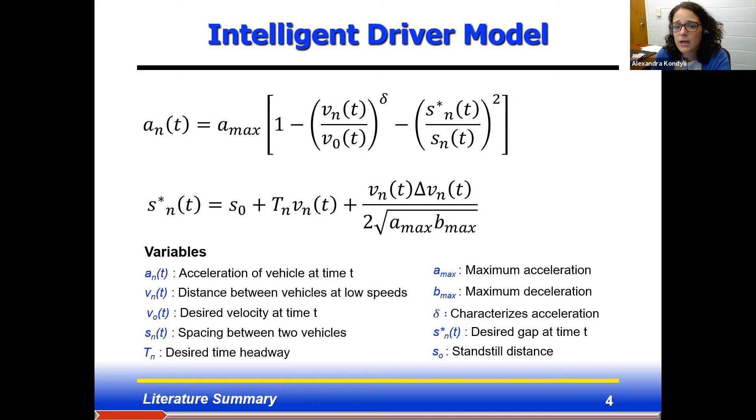As I mentioned earlier, this study focuses on the IDM, and the equation of the IDM is shown here. The IDM predicts basically the vehicle acceleration as a function of the desired speed and the desired space headway. And it is applied to both car following and free-flowing situations.

For situational awareness, which is our second human factors measure, we use the definition of Endsley. Situational awareness is defined as the ability to perceive, comprehend, and project future status of elements. So situational awareness has three components: perception, comprehension, and projection of status.

Research has shown that there's a relationship between workload and situational awareness. If we have very high situational awareness with low workload, that means that the driver can very easily comprehend the information without requiring increased mental processing. And this is basically like an ideal situation. When we have low situational awareness, though, and high workload, tasks require more processing capabilities from the driver, and this means that some elements may be overlooked during the driving tasks, and maybe just one subset of those elements can actually be processed. Of course, this situation is not ideal, as we might have dangerous situations like crashes occurring.

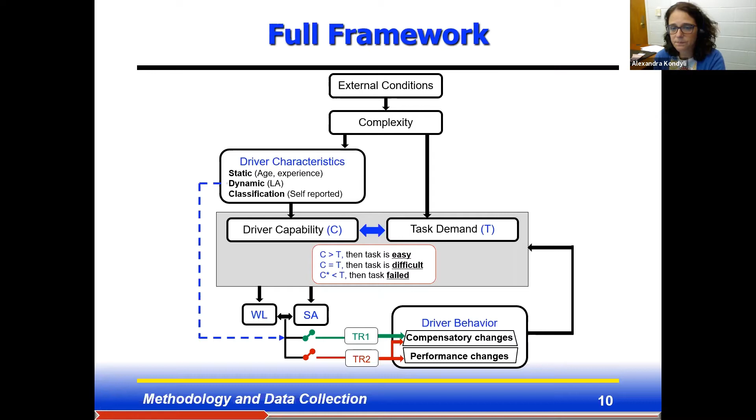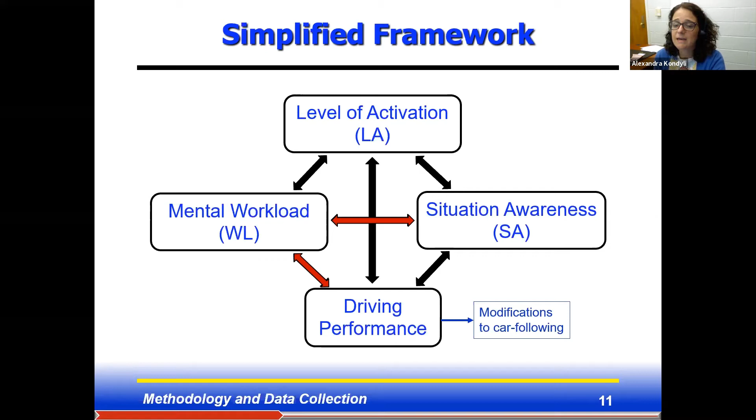To simplify this framework a little bit, in this project, we study the interactions between all of these four measures: workload, situational awareness, level of activation, and driving performance. Of course, some of these have already been studied, for example, workload and situational awareness, as well as workload and driving performance. But a holistic look between these four will give us a better understanding of how car following is affected by this very complex relationship.

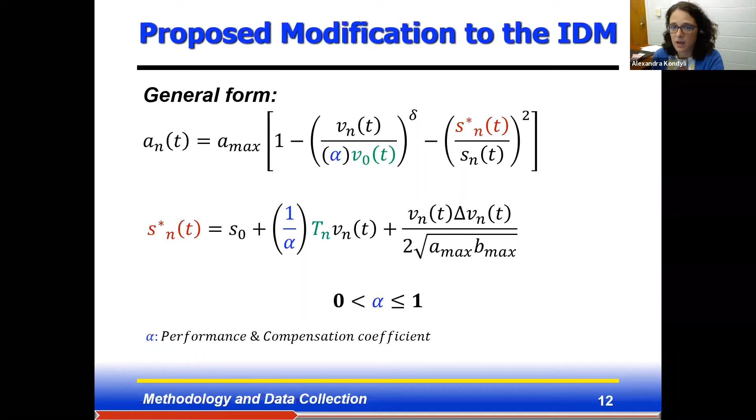Furthermore, we propose to capture the effects of this four-way relationship to the IDM by introducing a coefficient alpha, which captures both the performance and the compensation effects. And this performance and compensation coefficient is being applied to both the equations as it's shown here. This coefficient is calibrated based on actual driver data, which were collected in a driving simulator experiment.

So the equipment that we used in our research is the KU driving simulator, which is an NADS MiniSim simulator enclosed in a half cab. It gives 170 degrees field of view. The simulator is also equipped with an eye tracker, Fovio FX3, which is able to capture pupil dilation and eye gaze duration. And we also had a heart rate monitor and the EEG, all of which were synchronized with the driving simulator.

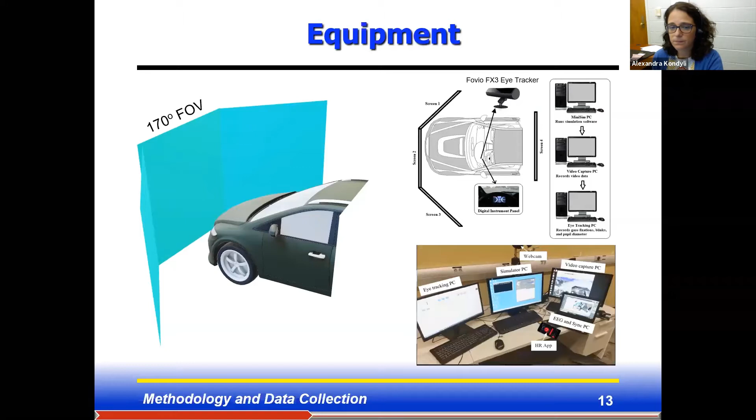Now, all of the drivers had to drive 6 different tasks. And these 6 tasks had varying difficulty. So task 1 was basically the simplest task, and this was used as our baseline. Task 2 was very similar to task 1, but with slightly more traffic. Task 3 had more trucks, and also an inactive work zone was present. And task 4 had increased percent of trucks and more work zone activity. Tasks 5 and 6 had a higher density than the other tasks. And specifically in task 6, we introduced a secondary task.

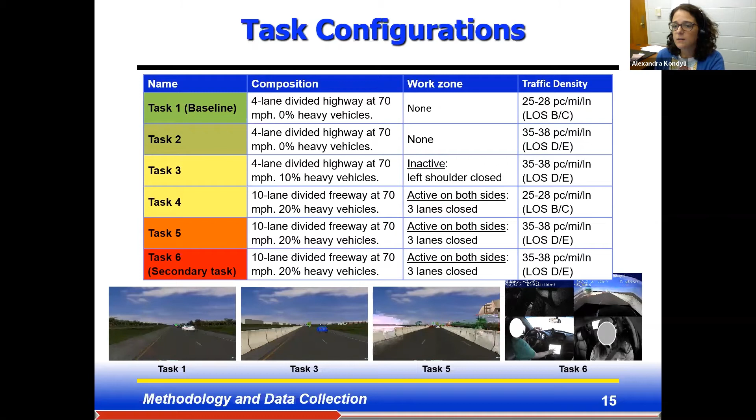So during that secondary task, participants had to use an app like this one that is shown here. And basically in the app, they had to click the correct number that appeared in the screen. So with this, we tried to simulate the driver trying to use their GPS system or any navigation system within the car, and basically taking their eyes off the road to do that.

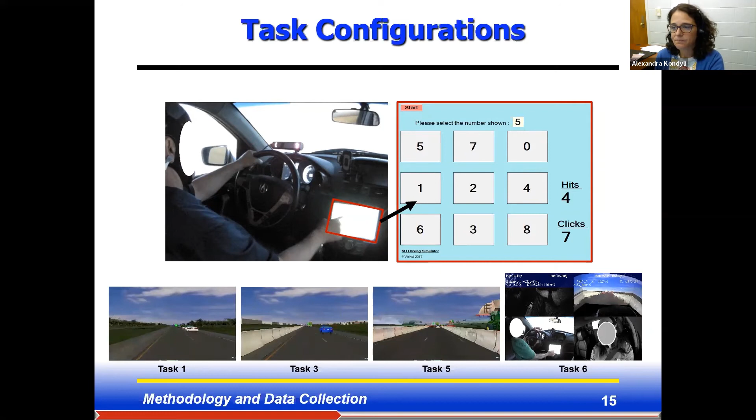We used a variety of data collection techniques. We got a rich data set, and in this way we were able to measure all variables of interest. We used changes in the heart rate. We also used the pupillary response and the index of cognitive activity that was measured from the eye tracker. And we also used the NASA TLX surveys that were administered during the experiment. All of these were used to measure the workload.

For situational awareness, we developed a new technique that measures changes in time to comprehension via gaze overlay, and we also used the SART method. For level of activation, we used the EEG, the power spectral density. And for driving performance, we used all of the variables that are basically collected in the simulator, such as speeds, accelerations, headways, standard deviation of lane position, and so on.

We also collected a variety of data to group drivers based on their traits. So we consider speed, gap, and jerk values. We also used a very elaborate survey instrument to gather the behavioral traits, using surveys found in the psychology literature, such as the PANAS, need for cognition, CRP, neuroticism, empathy, psychological entitlement, and ethical dilemmas. Since we have so many different data and data collection methods, the whole duration of the experiment was approximately an hour and a half long.

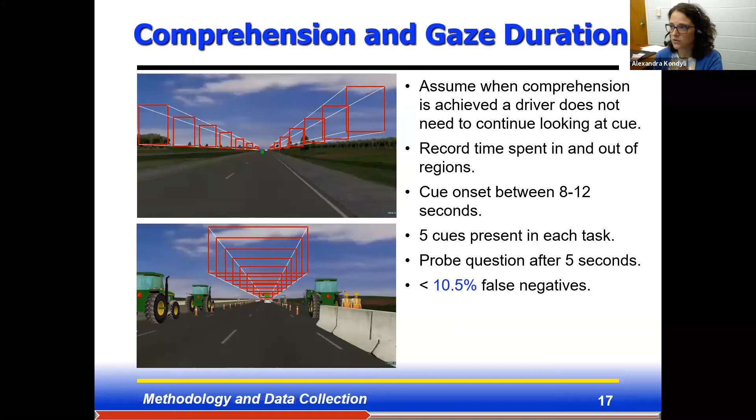Okay. Hi, good afternoon, everyone. Sorry, a bit of a technology problem there. Yeah, so I have control over the slides now. So just to quickly go over what we did, I'm going to reiterate a few things. I don't think I can still move the slides. Dr. Kondyli.

Okay, so I'm going to start again right from here, just to make sure I go over a couple of things.

The study itself was to model car following behavior, and we wanted to take into account how different drivers behave. If any of you have worked with car following, you know we have a lot of calibration parameters that come into play, and we adjust them relatively not knowing what they do. The whole goal is, can we account for some of these calibration parameters and make the calibration of these models way more efficient than it already is? If I'm able to group a couple of drivers together and use one set of calibration parameters instead of calibrating each driver individually, this would significantly reduce the whole effort put into the process of calibration. So that was one of the goals.

We did administer a lot of surveys, as Dr. Kondyli said. One thing I want to point out in particular is the cognitive reflection tasks - a few mathematical questions, and some of you may have come across these. For example, if a lily pad takes 48 days to cover a whole pond, how long does it take to cover half the pond if it doubles in size every day? We administer such questions because they're rather intuitive and they judge the aptitude of a person. So we want to see if their decision-making skills actually affect their car following behavior through such questionnaires.

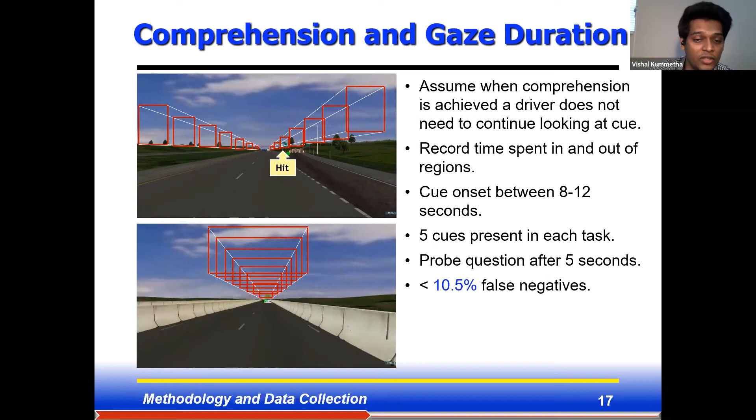Another example is this sign, where we have a variable message sign, and we're trying to see the driver read through the information and see how long it takes him to comprehend what the sign says. Then we administer a probe question right after the cue is passed, and we correctly calibrate the fact that he has comprehended the sign. We present five of these in each of the tasks, and we try to compute the level of comprehension for each driver.

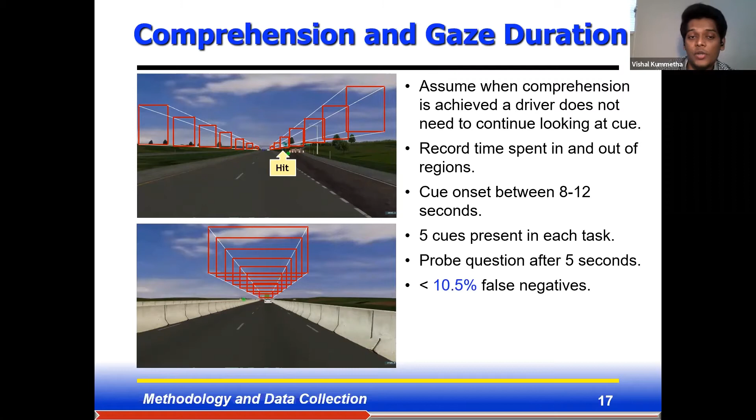Now, overall, the technique used here also resulted in about 10.5% false negatives. By this I mean, for example, people with corrective lenses - it wasn't very accurate in predicting their measurements. So we tend to exclude those from the charts that we created. But more on that in a few slides.

Now, we also plotted some driving performance, aggregate driving performance measures - for example, how does the average speed vary across these tasks?

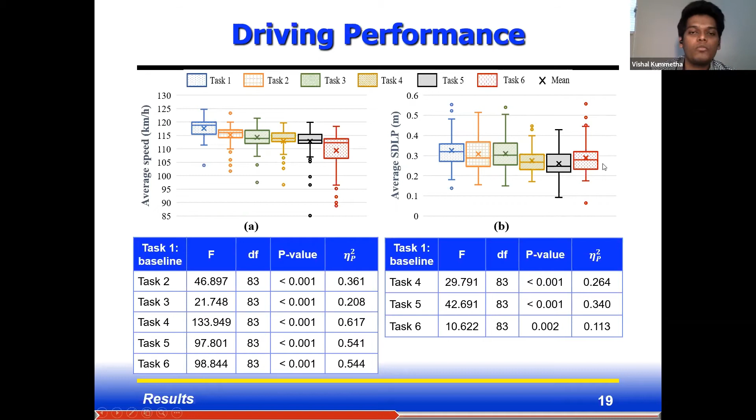We can also see some specific changes in lateral position. We have a slight decrease in lateral position followed by an increase when the distraction happened. So those are some key insights into how the thing was performed.

We looked at several other measures, including gaze concentration and how gaze variability was affected. We used this as a measure to predict some of our lateral positions for other relevant measures during the study.

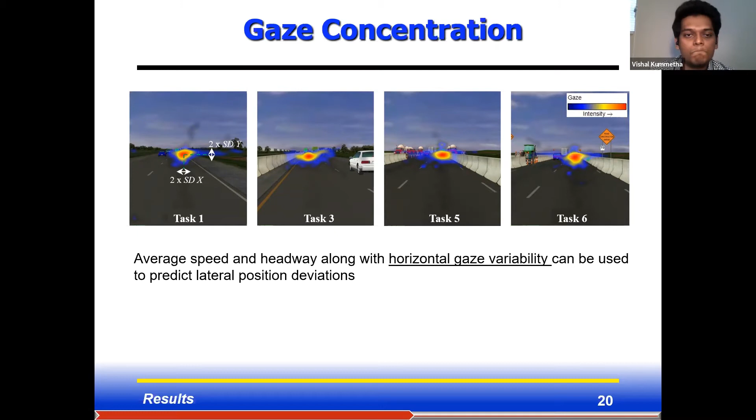Continuing a bit into the questionnaire data, what we noticed was that any individual who reported the speeds they follow in real life were significantly correlated to the values we obtained from the simulator. So although there was a 10% difference on average, questionnaires could be an accurate measure of how fast an individual can drive if we account for that 10% difference.

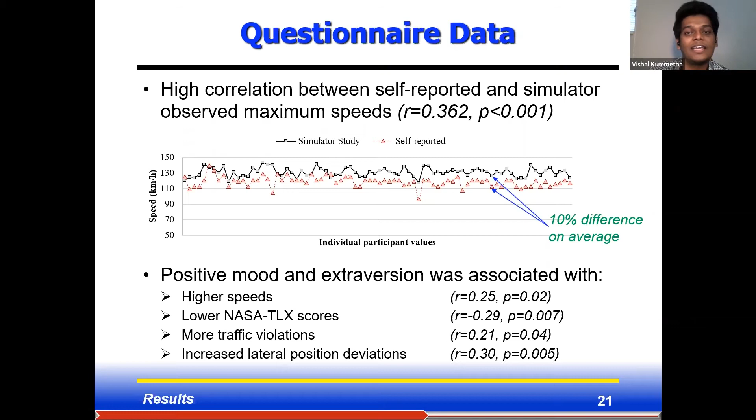So people on average report 10% less than they actually drive at. We also see interesting findings that positive mood and extraversion are linked: if someone is in a happy, positive mood, they tend to drive at higher speeds, experience lower cognitive workload, are susceptible to more traffic violations, and have increased lateral position deviations, so they tend to vary off the lane quite a bit. These were some interesting findings with the questionnaire based on personality and what we saw in the driving study.

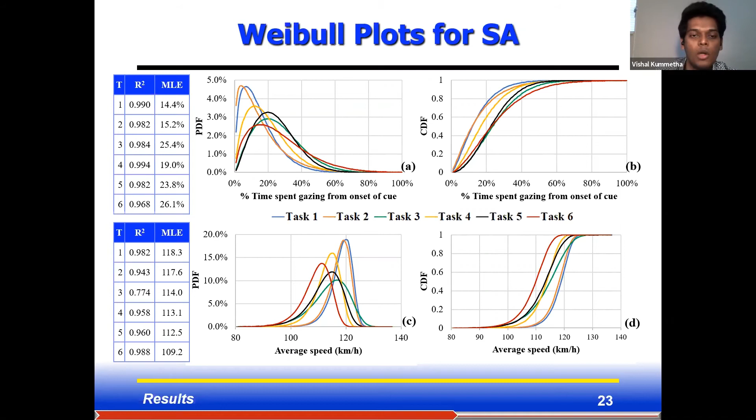Okay, so now to establish situation awareness, we normalize these charts, and any driver, say for example, spent 10% of the time looking at a cue, on a specific task, let's take task 1, which is the blue one. If you spend 10% of the time around here, there's a one score allocated to him, indicating that he almost definitely comprehended to the task.

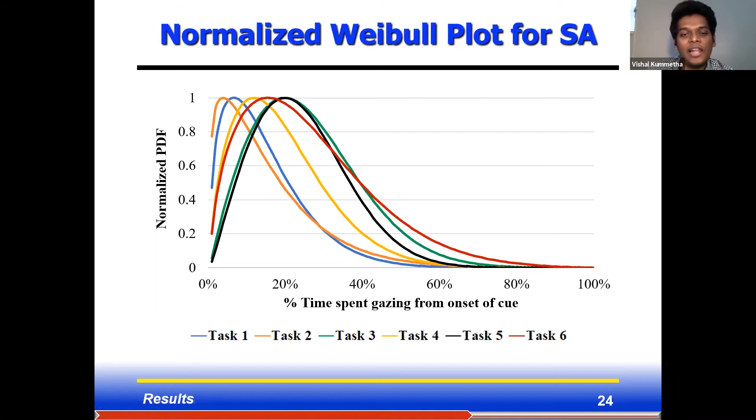However, if he spent about 5% of the time staring at something, there's only a 60% probability, so a 0.6 score was assigned to this driver. So that makes it more continuous, and we don't have to rely entirely on subjective measures for this.

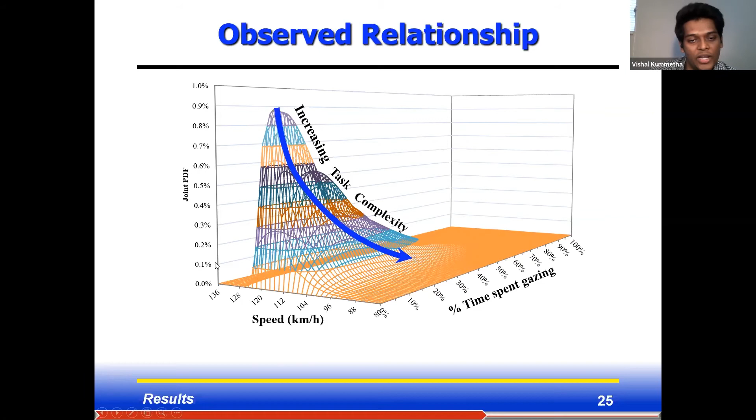As we continue, we developed this chart that gives you an idea of the overall relationship. As tasks got more complicated, we can see that the speed decreased. There is a nonlinear deterioration of speed that is clearly observed, and there is also a nonlinear increase in the time spent gazing to achieve this comprehension. So this was one interesting finding from the study.

Now, as we continue, this is the biobehavioral IDM, or the b-IDM, that we developed. To develop this model, we had to group our drivers, so we first established our driver groups. As Dr. Kondyli spoke earlier, we used these specific parameters: gap, jerk, and speed.

Just to point out, jerk is the rate of change of acceleration or deceleration. These measures are also commonly used by insurance companies to determine if you're a good driver or a bad driver. So we kind of fell back to some of these concepts, and we can clearly identify that driver group A and group B has different types of drivers.

You can see that a high score in jerk indicates that they tend to rapidly accelerate and rapidly decelerate. Out of the two, group A and B, you can see that group B leans more to the aggressive side. So they travel at higher speeds, they follow smaller gaps, and they also tend to brake and accelerate really quick.

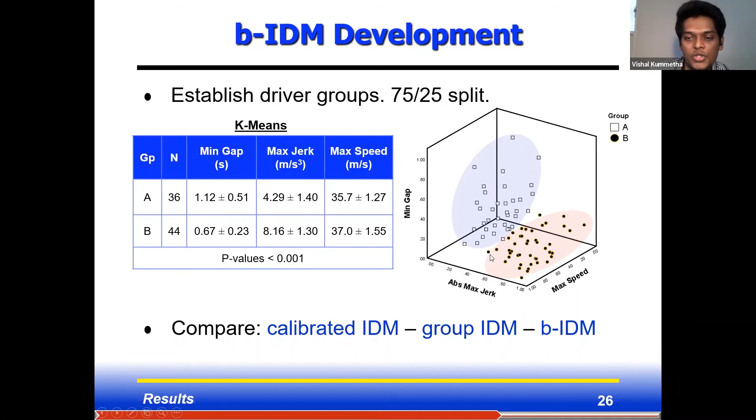Based on these, we use cluster analysis to get to these values, and out of the appropriate ones, k-means was the most appropriate as we have the least significant values. We also tried to keep our sample size split as evenly as possible, and you can see this chart that shows you how the different groups were established.

After establishing these groups, we come up with the variables that we use in the IDM for each of these groups, and tend to plot them across and compare across the original IDM to see which one gives you better results and which one is easier to calibrate on the whole. So when we do establish these...

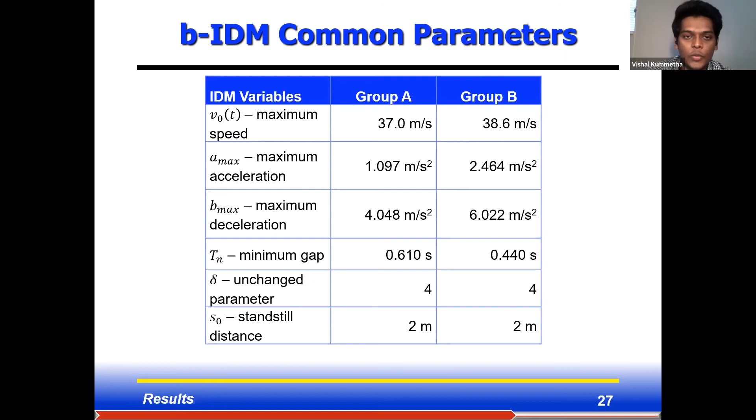We did develop, if you guys remember, it was from the alpha that we had to look for, which was the parameter that we're introducing to the IDM model that takes into account all these different continuous measures that we developed. So we carried out several ANCOVAs, analysis of covariances, and we did establish these significant measures. Interaction measures were also considered, but they didn't improve the model a lot, so we left it at this.

And you can clearly see, although the R squared is relatively low, these are behavioral models, and it's very hard to get a really high R squared because no two individuals are exactly the same. So you need to keep that in mind.

We also use the 75-25 data split, so we use 75% of our data to create these models and 25% to validate the models. After we establish this, we can see that the same variables are actually significant in both driver groups: level of activation, situation awareness, and workload as a measure obtained from the heart rate.

So we saw that the workload as a measure of pupil dilation was not valid. And then it was distraction present or absent, so it's a 1-0 binary value, distraction either 1 or 0. And then car following also significantly depended on the lead vehicle's velocity, which is understandable because you're following a car, and if they reduce speed, we would also reduce speed. Okay, so that's the configuration.

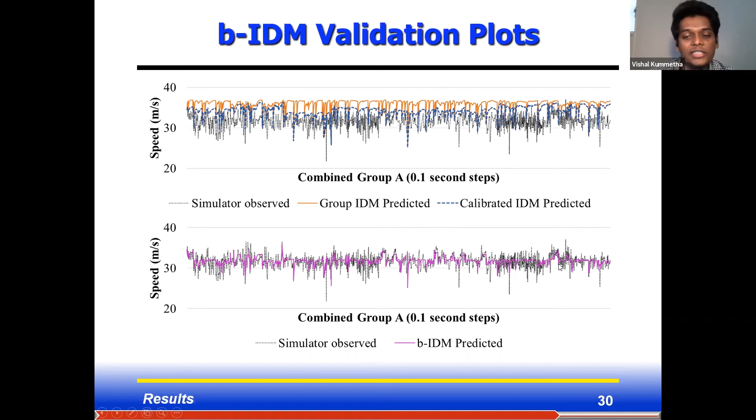Okay, I think I lost.

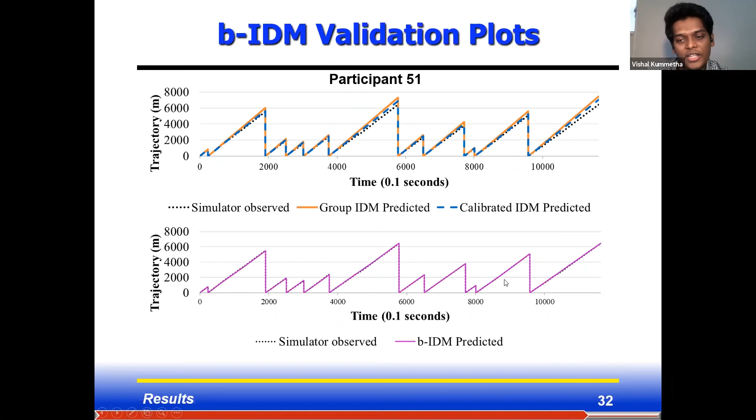Okay, and then the trajectories also, you can see how accurately the trajectories of the drivers are being predicted by this new car following model based on the alpha parameter. And when we compare the goodness of fits for each of these, the calibrated, the group, and the b-IDM, we tend to see that the b-IDM has the closest relationship to the true values observed in the simulator, while the rest are somewhat over the top.

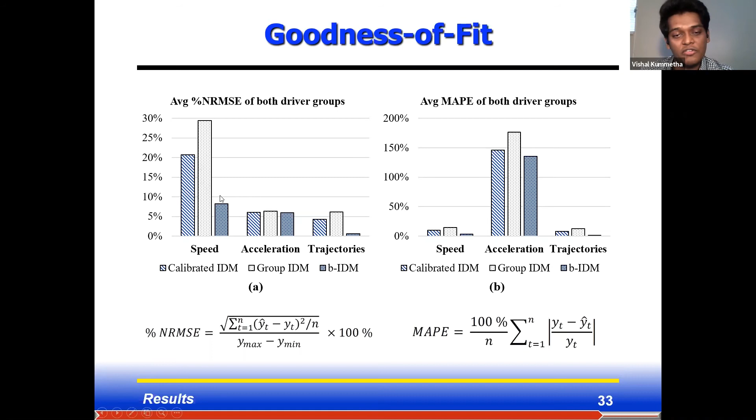And we use two different measures, the normalized root mean square error and the mean absolute percentage error. And one of the limitations of the mean absolute percentage error is that small decimal values are highly exaggerated, and that we can see in these values with 150% higher. But you can see that acceleration doesn't change too much, but we substantially improve predictions of speed and trajectories based on this new IDM model.

So overall, in conclusion, we developed different tasks over the simulator, which are actual tasks that we experience in driving. Not everything is less workload, and then we compare how the workload and situation awareness changes. We were able to establish different types of drivers with the cluster analysis, and we proved that there are different types of drivers and they have different car following characteristics, and we could easily establish these parameters. The general form of the equation is there. We have no substantial improvements to acceleration.

And we also saw that questionnaires cannot entirely be used as a substitute for driving performance measures. In fact, only for the speed. But for this study, since we depended a lot on the jerk rate, it should be taken into account that there's no way of predicting someone's acceleration and deceleration based on questionnaires. So driving performance variables are very helpful. So simulator data is always very helpful in calibrating this.

And we did develop a continuous measure to measure SA, which hasn't been previously studied, and this is in the works. So we're about to publish the study, and we also saw that we were able to predict lateral deviations based on where someone is looking and their speed. And this has been published in Accident Analysis and Prevention if you need more information on that.

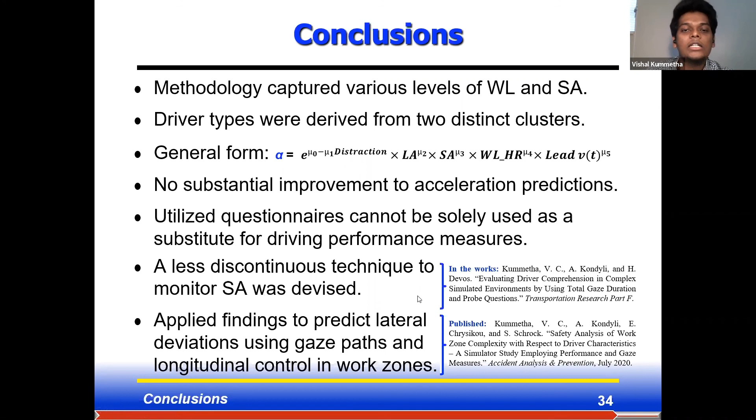And some of the limitations of this study: we assume a sequential change, so if the workload changes, then the situation awareness changes, then this leads to a change in driving performance. However, this is not the case. They're all interacting. So once my speed drops, then my workload reduces, then my situation awareness improves. So a lot is to do with the interaction of these terms.

And again, this study mostly focused on cognitive overload. So cases of underload, for example drowsy or fatigued drivers, haven't been examined, and that should be another part of car following. Also, this is entirely based on the task capability interface developed by Fuller. There are several other interfaces that have been established that could be used as well to change the study.

And behavioral questionnaires, whatever we administered, we had to administer them a few weeks or sometimes a month before the driver actually appeared for the study. So this kind of created a lag in the interpretation of the results. And maybe if we had about 6 hours in this driving simulator room, we could do a direct correlation there. But again, it's impossible to keep people for 6 hours.

Also, the transferability of simulator results. This is always a concern, that we're not sure how well the results can be transferred to real-life trajectories, but we hope to do more work in that area. And yeah, for future research, we suggest implementing naturalistic driving studies. We're going to try and implement the b-IDM in simulation models and see how it affects traffic flow and if something can change for that. And also an extension of the framework, so partial automation and that.

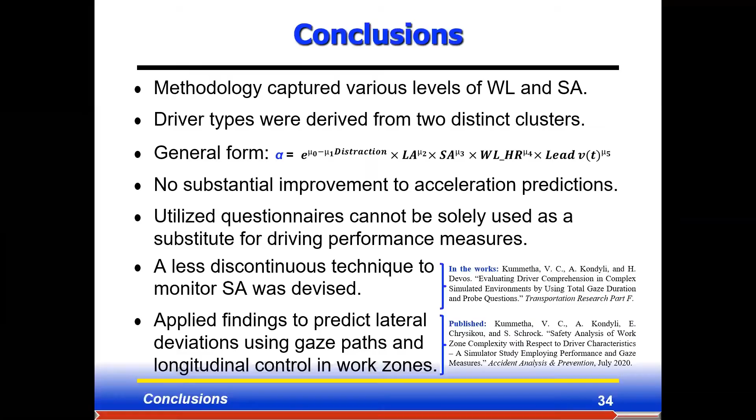Sure. Just a quick question on your regression model. You had several terms that are multiplied together. Many are raised to exponents based upon your fit. Many of those exponents are very small. Yes. I don't know what the magnitude of LA is, but won't that force that term to be essentially something close to zero? No, exponent to a negative value, right?

So technically what happened is we just combined a whole bunch of continuous data, and we're looking at several time series values. So if I excluded the value of level of activation from this model, although it would cause a relatively small change, it's still enough to have a relative power of 0.5. So if that makes sense. Okay. Thanks. Yeah. So we have the powers right there. Okay.

Great. Any other questions? Hello. Can you hear my voice? Hello. Yes, go ahead. Oh, okay.

Sorry, I was on the road, but I feel like this topic was very interesting because I had a similar study last year. So I just stopped on the roadside to ask a question. Probably I'm not heard clearly, but I would like to ask: you have 3 groups, between groups, when you design the experiment. What did you find in terms of ages, like different drivers? Or did you group drivers in terms of their driving experience?